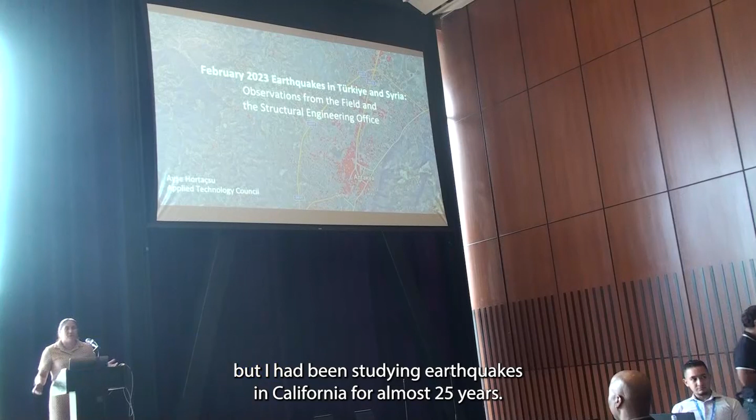I'm originally from Turkey, but I have been studying earthquakes in California for almost 25 years. It all started with the 1999 earthquake that killed, what they say, 17,000 people at the time. That really motivated me to become an earthquake engineer. And again, naively I thought, if I study it, it will fix itself.

Apparently it doesn't. I hope my presentation today and all the following presentations motivate you to continue doing what you're doing, but also think about how this is going to impact the real lives of people who are affected by these earthquakes. I work at the Applied Technology Council.

Our focus is on technology transfer. We take research and make sure that practitioners can use it. We work with governments to make sure they have seismic retrofit programs to implement it.

But again, it's not fixed yet. So there's a lot of work to do, and I hope what you're going to see today, what you're going to learn from all of these earthquakes, will ground you in for the work that you're doing.

Today I'm going to give you a perspective from a structural engineer's perspective. A geotechnical engineer isn't able to be with us today, so there isn't going to be much geotechnical or ground motion information, but a lot about the engineering practice in Turkey.

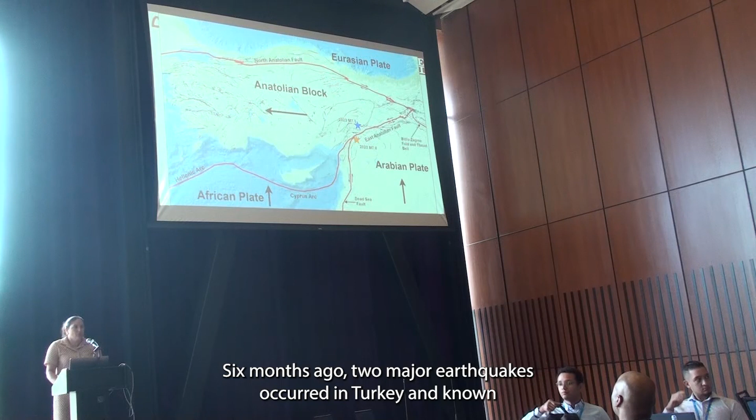I hope you're all familiar with the earthquake by now. It is now over 6 months ago. Two major earthquakes occurred in Turkey on known seismic zones.

Turkey is the place where history, cultures and religions have been coming together for millennia, and it's also where plates come together. When plates come together, they have a little party, and all of these dots are historical seismicity, over 5.5 in the last 100 years. So it's a really seismically active place.

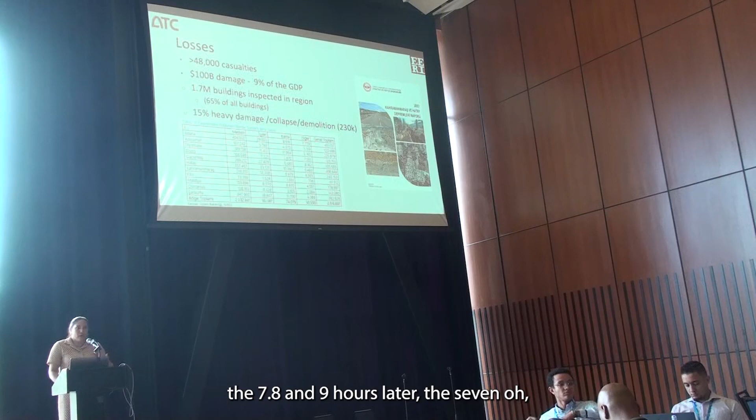These two earthquakes, the 7.8 and 9 hours later, the 7.5 that followed, caused major amounts of damage, and you've all seen this in the news.

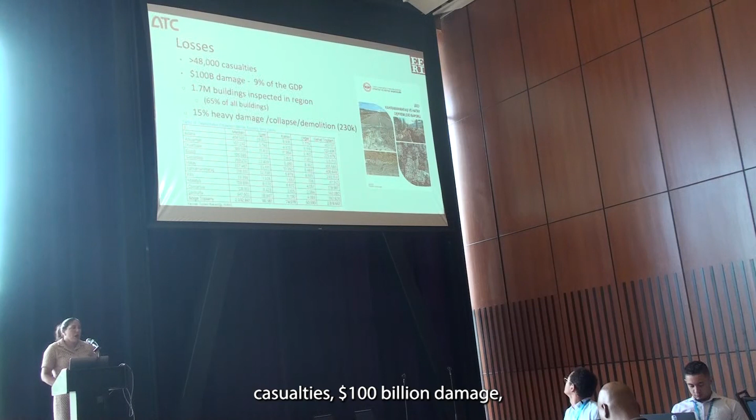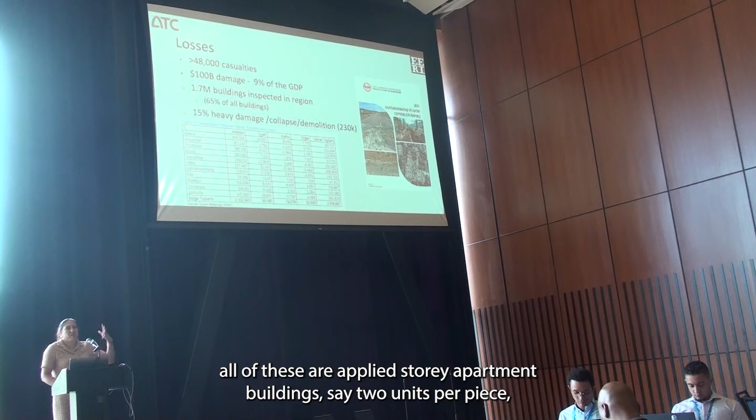The official numbers are still around 50,000 casualties, $100 billion in damage, and to be honest, this number really sounds low to me. If 230,000 buildings were damaged, and almost all of these are 5-story apartment buildings, say 2 units per piece, that is more than 50,000 casualties that one should expect, but this is the official number.

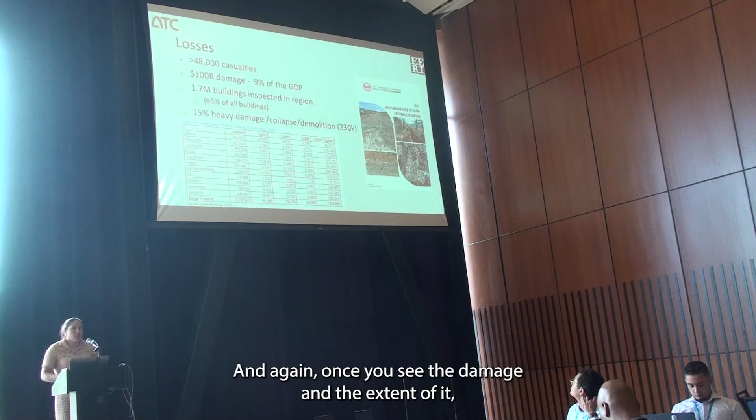Once you see the damage and the extent of it, heavy damage is practically a collapse, and it would be really hard to get out of that if this happened to your apartment at 4 a.m.

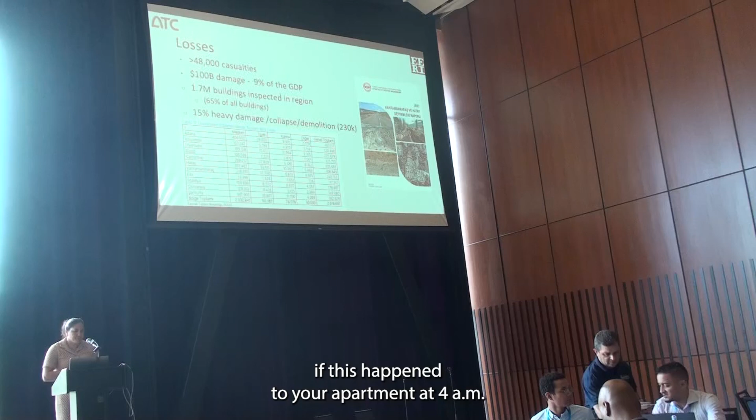There's a lot of reports that are coming out, and this is a snapshot of the earlier reports. The Turkish universities published a lot of reports. The Turkish Ministry of Strategy has a report that came out exactly 30 days later, and that's the one that seems to be collecting all of the official data.

We worked closely with STEER to prepare a virtual reconnaissance report, and GEER, the Geotechnical Extreme Events Reconnaissance Team, to bring together all of our findings from the field.

Since then, there are other reports coming out. I recently read a report by Build Change. If you're interested more in the process of things in Turkey, that is a really good resource. And of course, many papers are currently coming into different journals and conferences for your review.

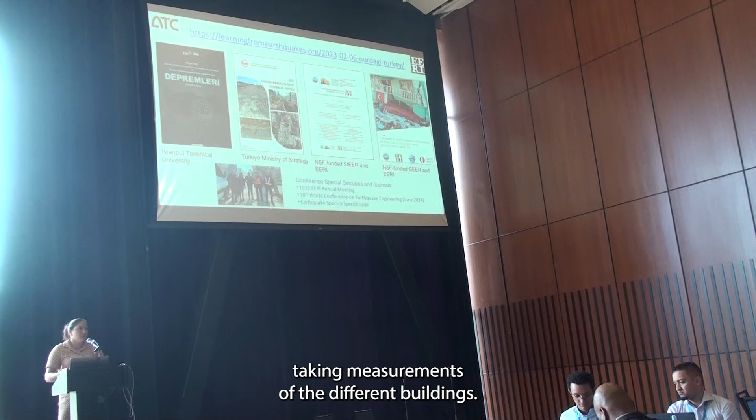Another one I'd like to put on your watch list: the ACI 133 committee spent over 2 weeks in the field with about 24 engineers and researchers taking measurements of the different buildings. That might be a very interesting database for you to refer to in your research in the future.

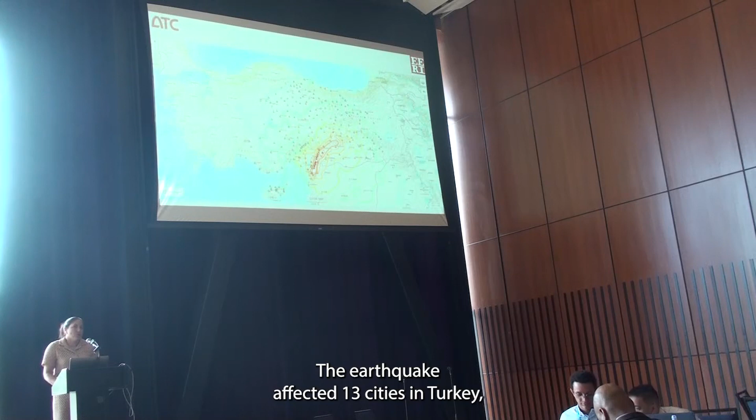The earthquake affected 13 cities in Turkey. That's actually equivalent to about 13% of the Turkey population. There were 280 ground motion stations in the region, so it is a very well documented earthquake.

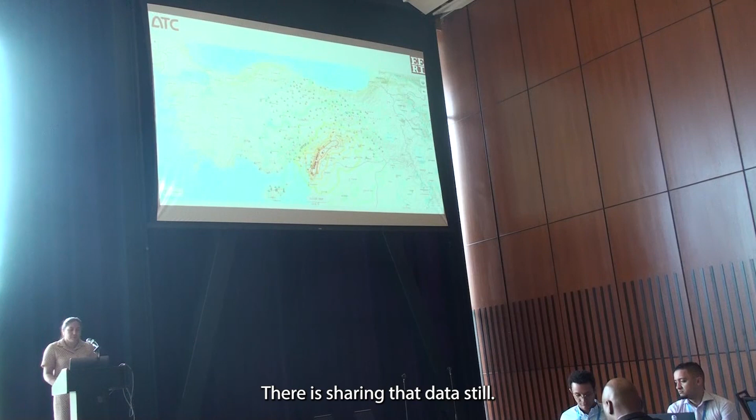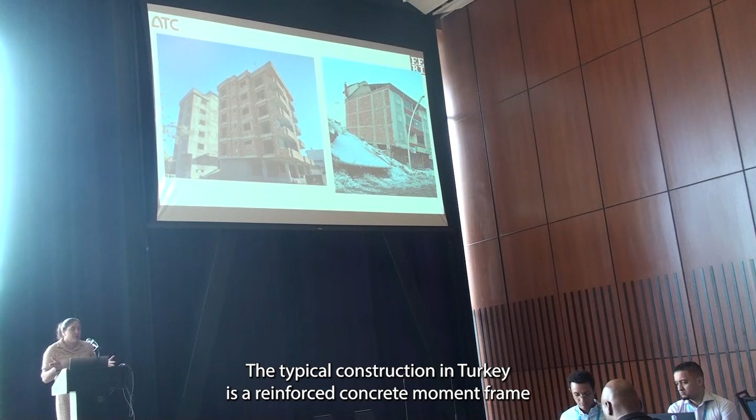For the ground motion information, you still have to refer to the Turkish websites. The Turkish equivalent of FEMA is still sharing their data. Now I'm going to show you information about the structural damage. The typical construction in Turkey is a reinforced concrete moment frame with unreinforced masonry infill, and the masonry is also hollow clay tile.

More than 37% of the households in the affected regions were built prior to 2000. And you're going to see why that time is very important.

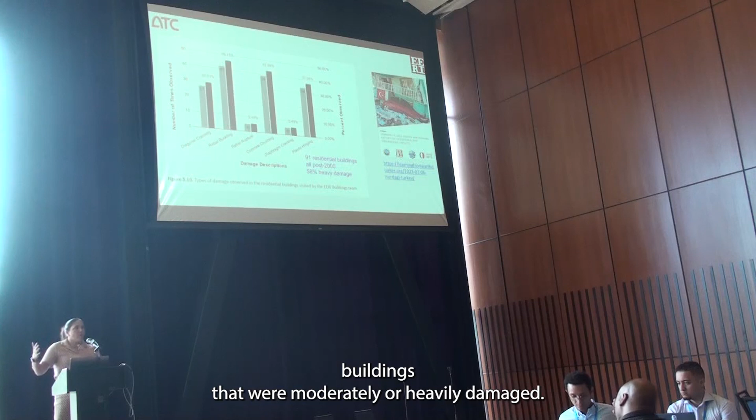One very important thing the EERI team did on the field was visit post-2000 buildings that were moderately or heavily damaged, to collect data about typical damage patterns in these buildings. They looked at 91 residential buildings.

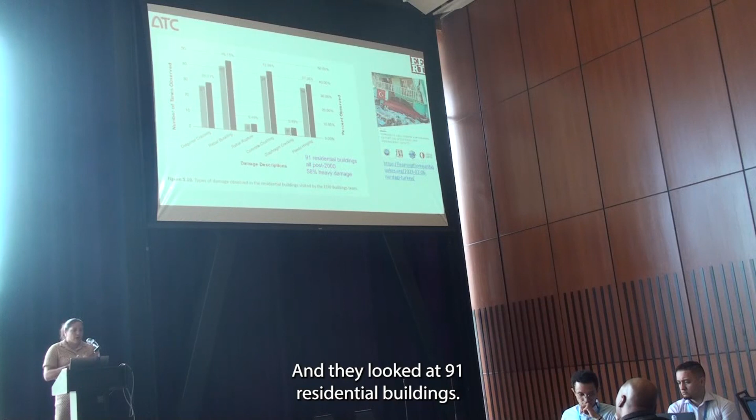In these regions of Turkey, there isn't really a commercial downtown full of shiny skyscrapers. A lot of the commercial regions are the original centers of the town, so commerce happens on the first floor of an apartment building, or an entire apartment building is full of lawyers' offices and travel agencies, so everything almost looks like a residential building.

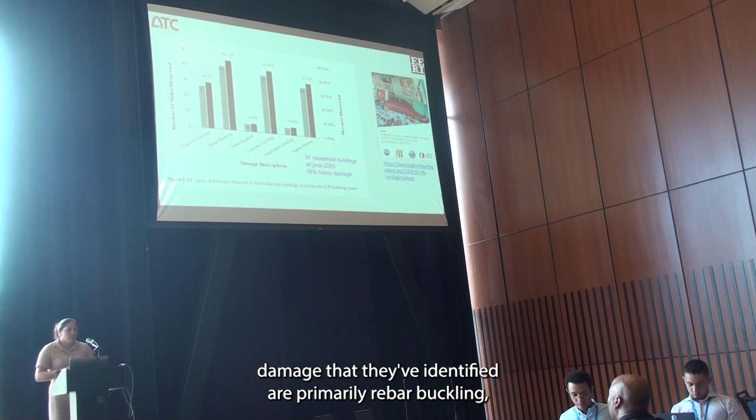So the damage they identified was primarily rebar buckling, plastic hinging, and diagonal cracking. These are the most commonly observed damage types in buildings that were still standing.

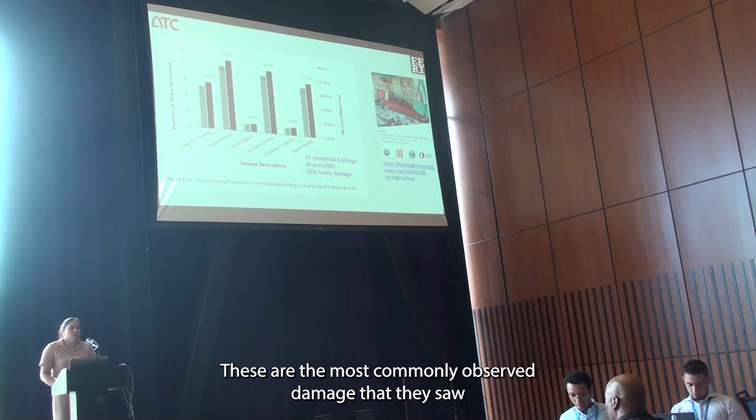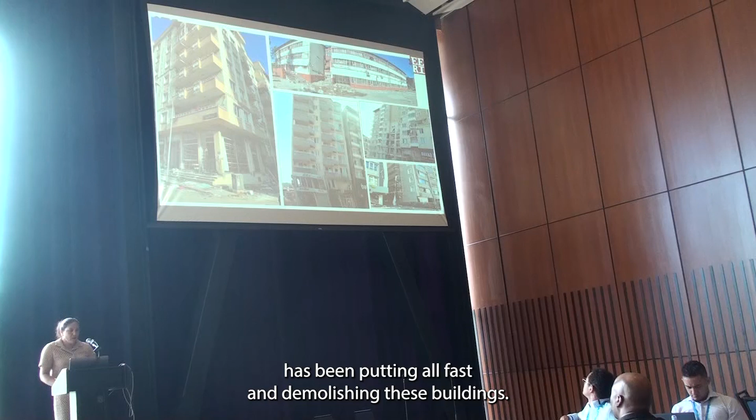Here are some examples of that damage. The building that is vertical on the side has a big Y on it, because all of the columns on the first floor had buckled, and the Y indicates yıkım, which means demolition. This building was slated for demolition, and the government has been pretty fast in demolishing these buildings. The one in the middle is actually the only time we saw short column damage. Another one in the middle with the leaning—I think it's a picture-perfect P-delta situation there.

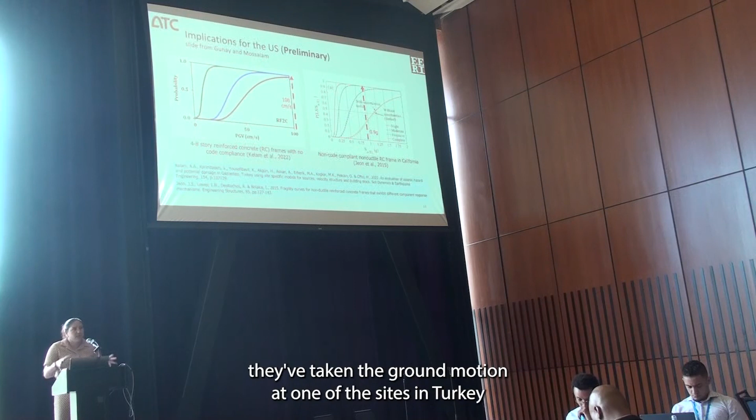This slide was provided to me by Dr. Günay and Dr. Mosalam. What they've done is taken the ground motion at one of the sites in Turkey, in Gaziantep, which had a PGV of 108 centimeters per second and an acceleration of 0.9 g.

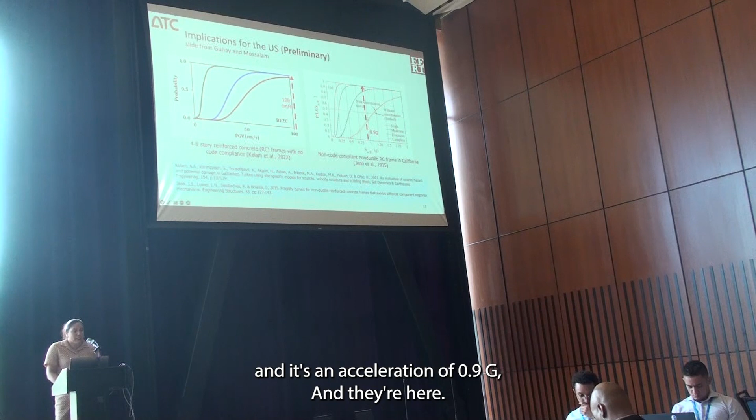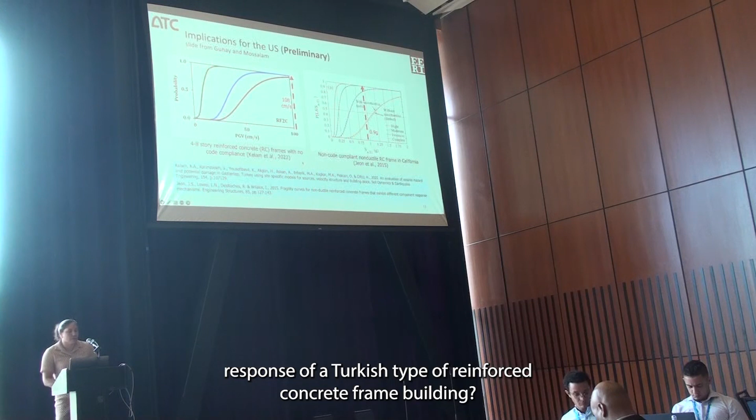And they're comparing it to what's the expected response of a Turkish type reinforced concrete frame building. As expected, the buildings collapsed. Here they're overlaying it with how they think a California non-compliant building would perform.

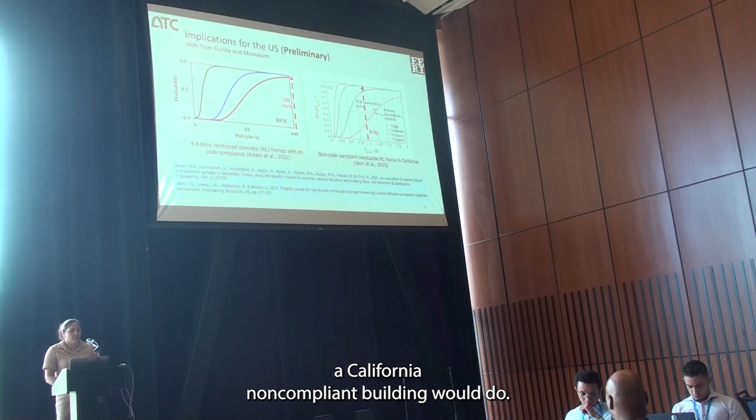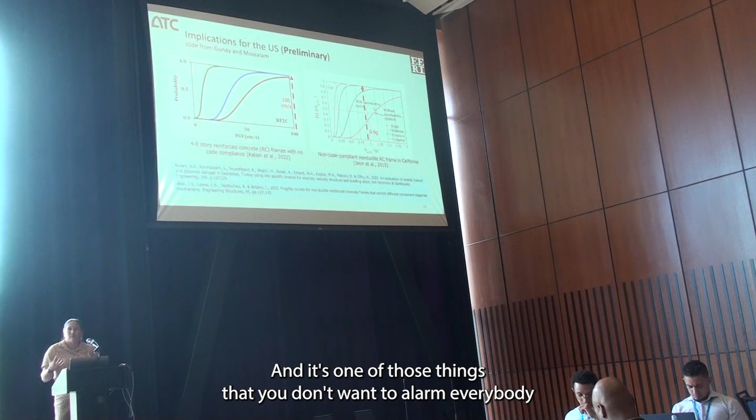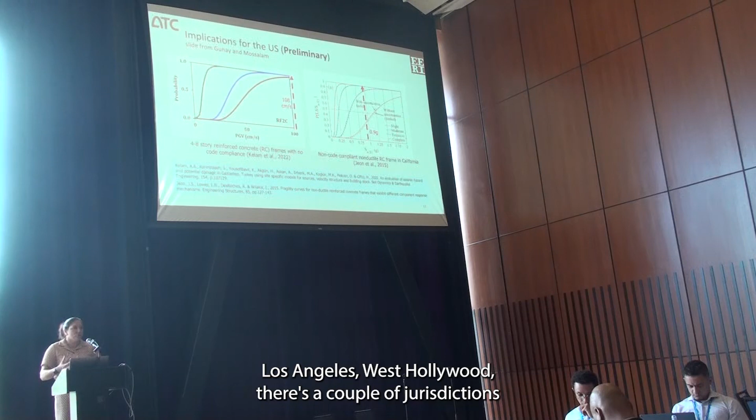There's been a lot of news about what this type of earthquake would do to California. It's one of those things—you don't want to alarm everybody and say run out of all your older concrete buildings, but the older concrete buildings clearly pose a danger to the population in this highly seismic area. If you've been following the news, Southern California, Los Angeles, West Hollywood—there's a couple jurisdictions that have enacted seismic ordinances for retrofitting their non-ductile concrete buildings. And the city of San Francisco is considering establishing one as well.

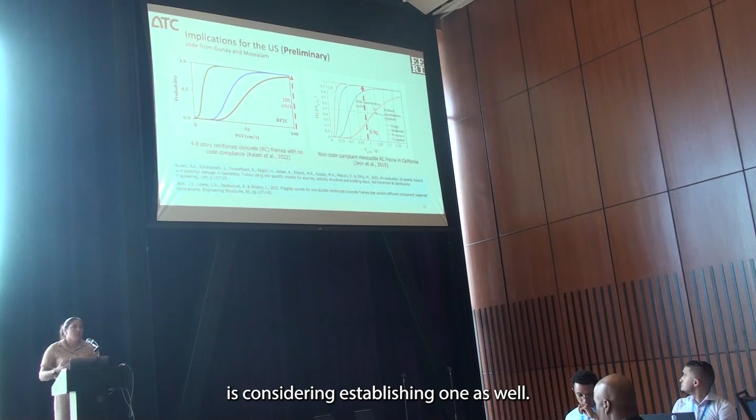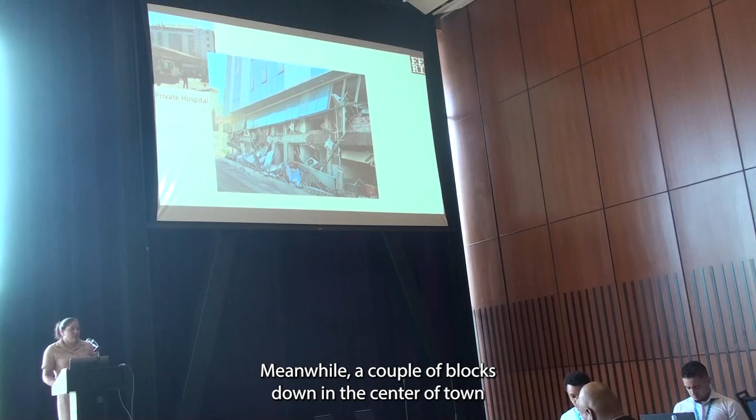Meanwhile, a couple blocks down in the center of town was a private hospital that we walked by, and this had lost an entire story.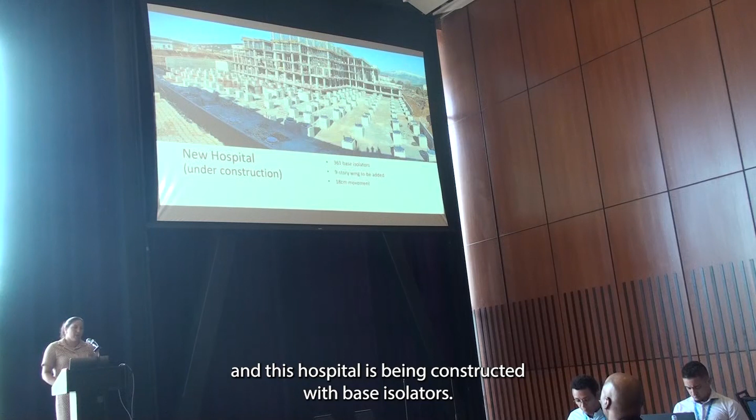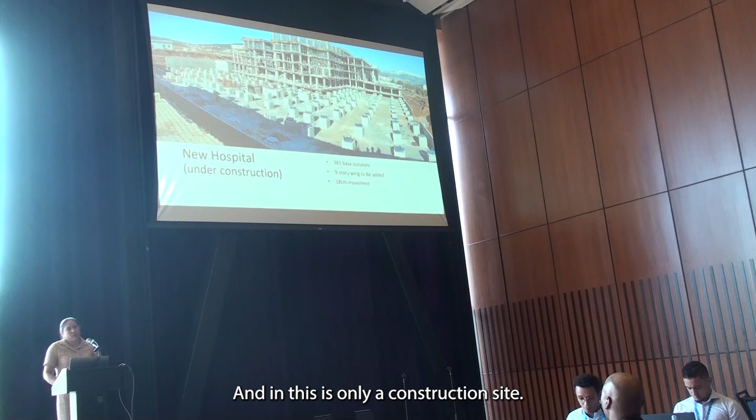On the outskirts of town, we walked through a construction site of a new hospital being constructed with base isolators. Since 2017, the government has required the use of base isolators in large public hospitals. This was only a construction site, but of course they had no damage, even the scaffolding had no damage.

However, next door was a hospital constructed only 10 years ago. It looked really good from the outside, but had major non-structural damage inside, such as ceiling tiles fallen and fancy atrium veneer falling off the walls. We had been warned about this hospital by other doctors, who said doctors won't go in because the walls are falling, even though it's just architectural veneer.

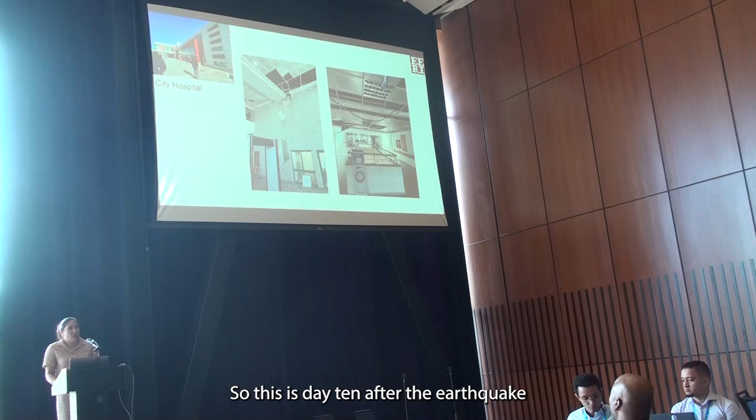That said, they did have a fire in their mechanical room. So on day 10 after the earthquake, this pretty new hospital was not functioning.

Even worse, we went to see the water supply. After the earthquake, they immediately lost power from the main, so they had no water from the main for about 6 days, during which they should have been relying on their water tanks. However, the water tank sloshed, hit a column on one side and the wall on the other, and they lost all of their water.

So even if the hospital had been able to work, you cannot run a hospital without hygiene. On day 10 following the earthquake, this newer hospital was operating out of a field hospital. This is similar to what we observed driving by other hospitals as well: the hospital looks good from a drive-by, but there's a field hospital set up outside.

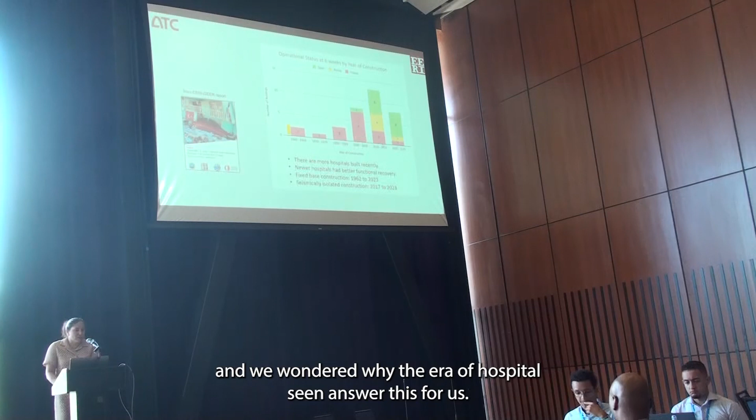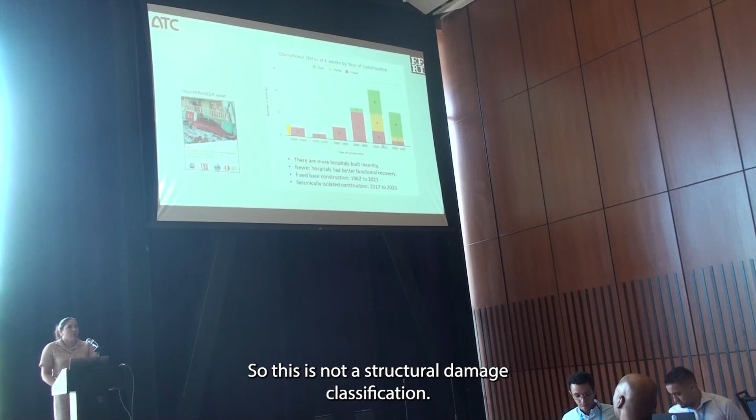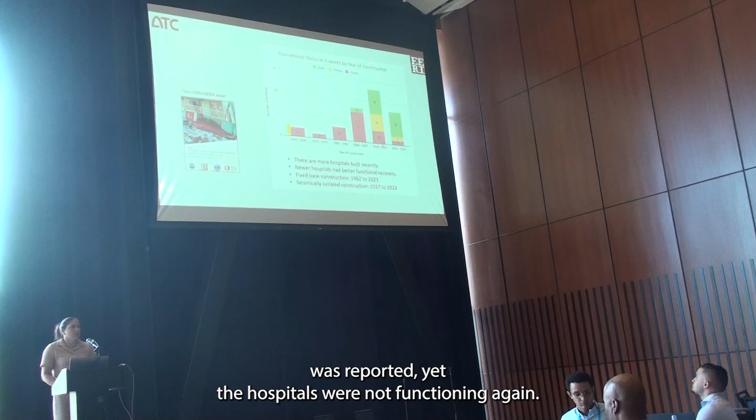We wondered why, and the EERI hospitals team answered this for us. They intentionally went to hospitals and found that so many were not functioning following the earthquake. This is not a structural damage classification, but whether the hospitals were functioning or not. According to the reports, there were only maybe 1 or 2 hospital collapses, with no other major structural damage reported, yet the hospitals were not functioning. What's the point of a hospital if it's not working after the earthquake when you have injured people?

Lifelines, just like hospitals, are a very critical part of a community. I keep showing this quote from the EEFIT team: Hatay had its bones broken in pieces. This is the old city that was heavily damaged. It's a really historical city, and they lost power, lost water, lost their hospital, and nobody could come help them for a long time.

Here's an example of why. The fire station collapsed on top of the fire trucks. Luckily, the firemen running to their trucks survived because the trucks held up the collapsing building. But now they lost 3 fire trucks, which is exactly what you need to respond to an earthquake.

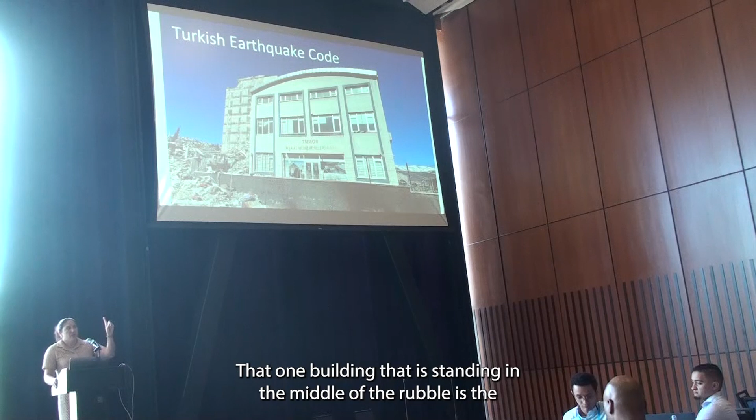So let's put all of this in context of the Turkish earthquake code. I think there's probably a lot of interest in that. This is actually from that really collapsed city that I was showing earlier. That one building standing in the middle of the rubble is the Chamber of Civil Engineers, similar to ASCE in Turkey. There were a lot of pictures of this in the news, of course.

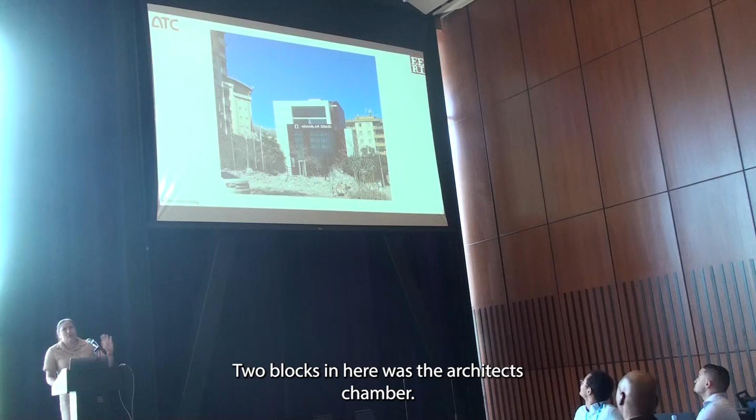Engineers design their own buildings better. The news kind of neglected that two blocks over was the architect's chamber. So apparently architects also design their own buildings better.

Turkey has had an earthquake code since 1975. It's always an evolution, of course. This is from a recent paper by a professor at Istanbul Technical University that I found very helpful. They are tracking the code and its impact on actual design over the years, and one thing you can highlight easily is the reinforcement.

You know, is it deformed or not, right? Smooth bars were a major problem in the 1999 earthquake. Until 2007, it still was, because it takes a while for code enforcement to trickle down.

They also reviewed the stirrup spacing. As you might remember, confinement was a main damage mode in the structures we observed. The stirrups used to be spaced at 30 centimeters.

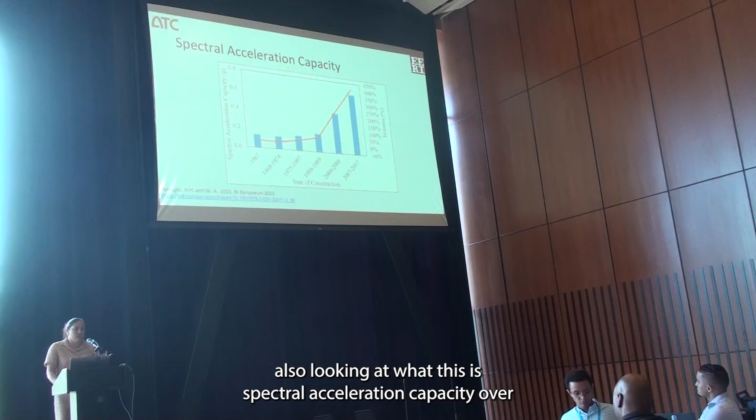They're also looking at the spectral acceleration capacity of a code-designed building over the years, following through the different design codes. So everything is getting better, everything is improving, yet there is a really large body of existing buildings, and all of those are in danger.

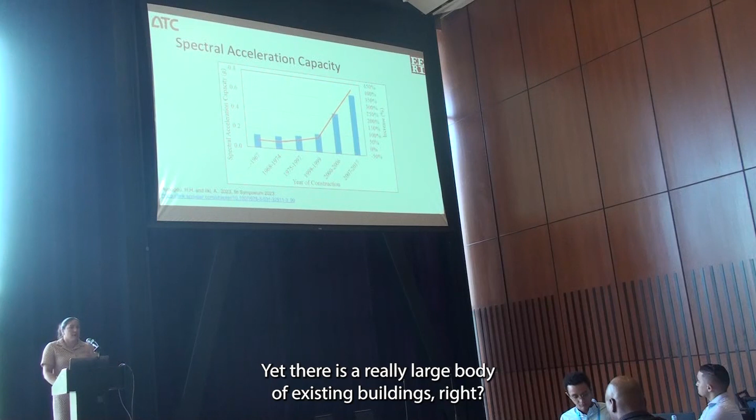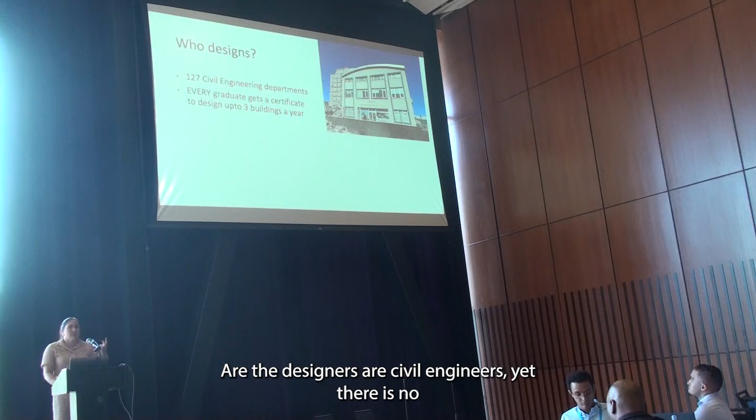Now quickly, another important factor in Turkey was responsibility. Where does it lie? The designers are civil engineers, yet there is no professional engineering license requirement in Turkey, and any graduate out of a four-year program can design three buildings a year.

One could say even with a PhD, perhaps you should not be designing three buildings a year immediately, right? You need to learn how to do it, you need to apprentice. And what kind of tools do they have? They have package programs where you put in the architectural drawings and it spits out where your walls and columns should go.

And I quote our friend Ashraf here. He says, why was the name SAP selected for his nonlinear analysis tool? It was selected to remind the user that this program, like all computer programs, lacks intelligence. It's the responsibility of the engineer to idealize the structure correctly and assume responsibility for the results. So machine learning, all these cool things we're talking about, all these models, it still comes down to you to make sure it's the right thing for the right building.

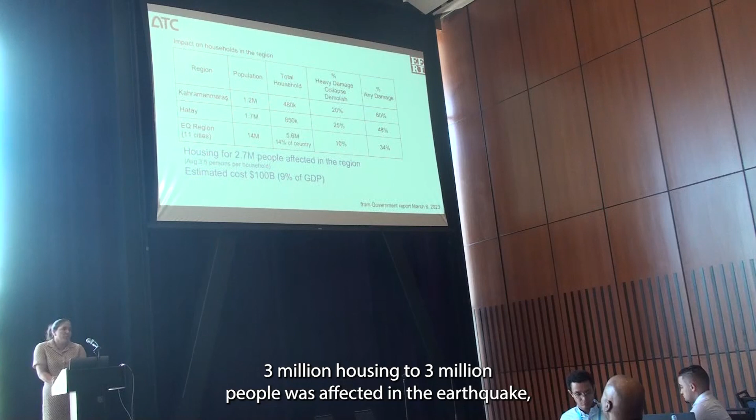What's next? Many people have been displaced. Housing for 3 million people was affected in the earthquake, which led to migration as people left the town. This is one way I've been tracking it: immediately after the earthquake, two weeks after, they placed 100,000 students in different schools, and by May only about a third of them had come back to their original schools. So that should give you a sense of who's coming back and who's not.

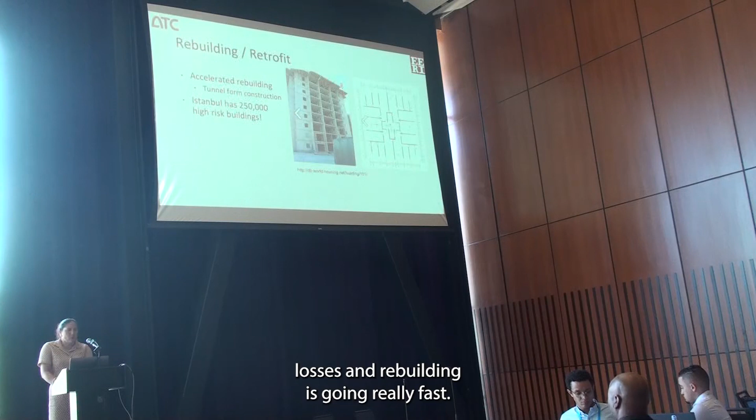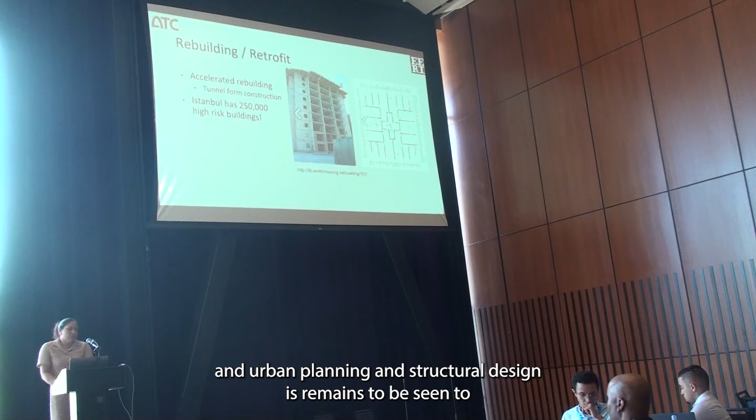There's a little bit of insurance help, about 55% coverage, but as you can imagine, that's not going to cover everybody's losses. Rebuilding is going really fast. Whether the rebuilding is done with proper care, urban planning, and structural design remains to be seen. So, thank you for your attention. That's all my time.